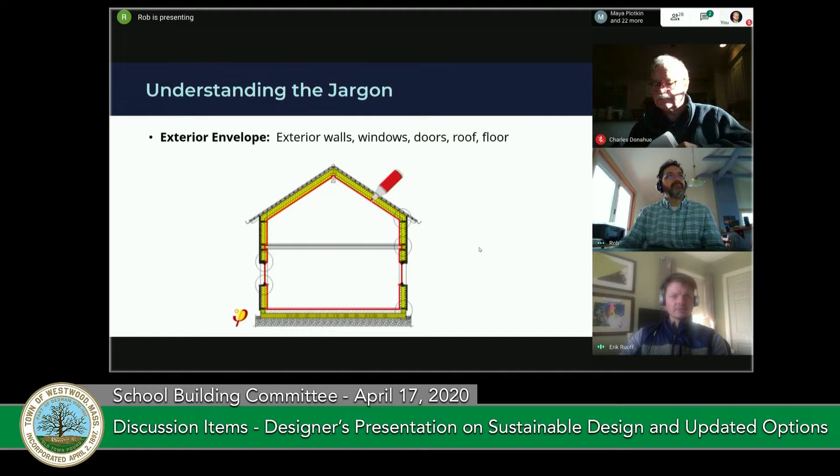So keep moving here. Exterior envelope, what does it mean? Well, it's the walls, windows, doors, roofs, and floors of the building, right? This is the thing that keeps the weather out and keeps the warm and the cool in. So we just want to make that as robust as possible, understanding that it will impact the performance of the school.

So also talking about some of the systems that may be proposed, there's a lot of talk about using heat pumps, right? Heat pumps are basically a system that moves heat in or out of a building using the refrigeration cycle. You can think of this as the AC unit you have in your house, where there's a unit outside that is, in the AC world, moving the heat from inside your building outside. Well, heat pumps have the ability to go both ways and either remove heat from inside or deliver heat inside, and they use that through the refrigeration cycle to be able to steal or get rid of heat based on the simple refrigeration cycle.

And these systems use all electricity for heating and cooling, which has some benefit when we talk about decarbonizing buildings and looking to make a building that's ready to be net zero and reduce carbon, the burning of fossil fuels on site. So this is the alternative to a natural gas heating system, going with a photovoltaic supported heat pump type system, whether it's air, ground, or water.

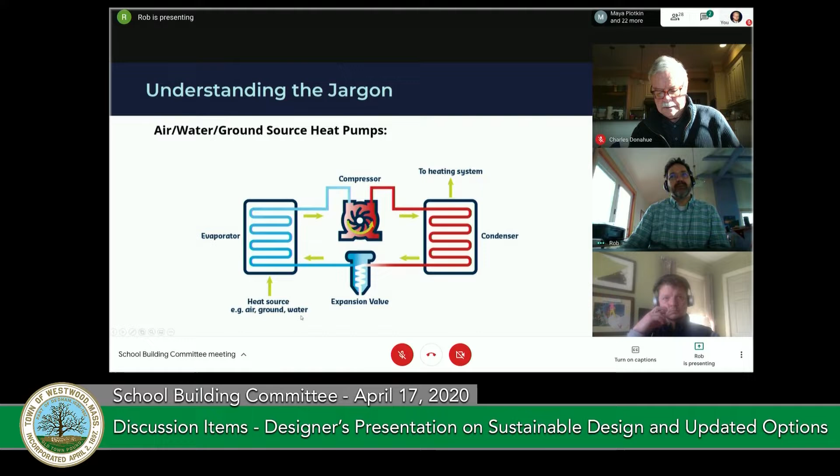We'll talk about this in the next slide. So people talk about geothermal or ground source heat pumps. Geothermal is actually a misnomer - you think of geothermal, you think of Yellowstone or Iceland, where there's actual heat under the ground. What a ground source heat pump is, again, since heat pumps are moving heat from inside to outside, they have to be able to source that heat or get rid of that heat to the outdoors. When you're talking about an air source, which you think traditionally of your house, the air temperature fluctuates much more season to season, when the ground temperature remains largely constant throughout the year. So there's some increased efficiencies of an already efficient system when using ground source heat pumps.

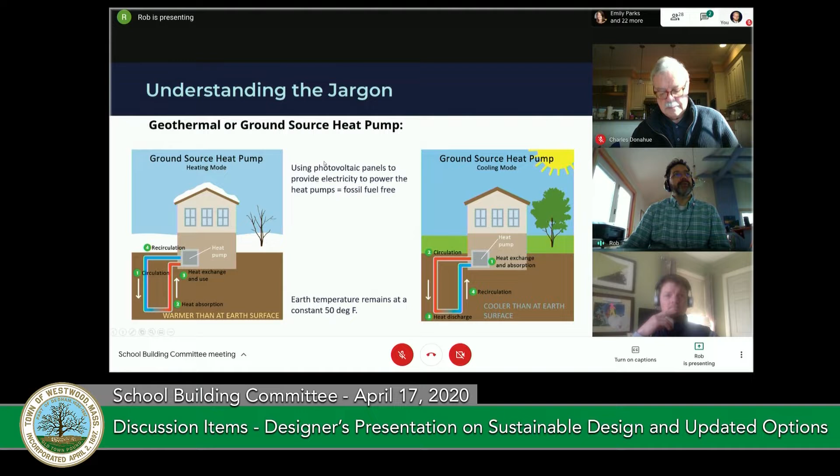There's also some added costs, right, because rather than just having the outdoor units, you have to drill wells to create that system. And again, the benefit here is you're not using any fossil fuels - you're able to support this system using the photovoltaic panels.

So talk about net zero - what does that mean? Well, it means at the end of the year, your building produces as much energy as it consumes throughout the year. Our goal is to design a low energy building, and there's discussion about how to make up that energy consumption through linkage to some of the town's initiatives for photovoltaics, and making the roof positioned to take on or install photovoltaics on site as well.

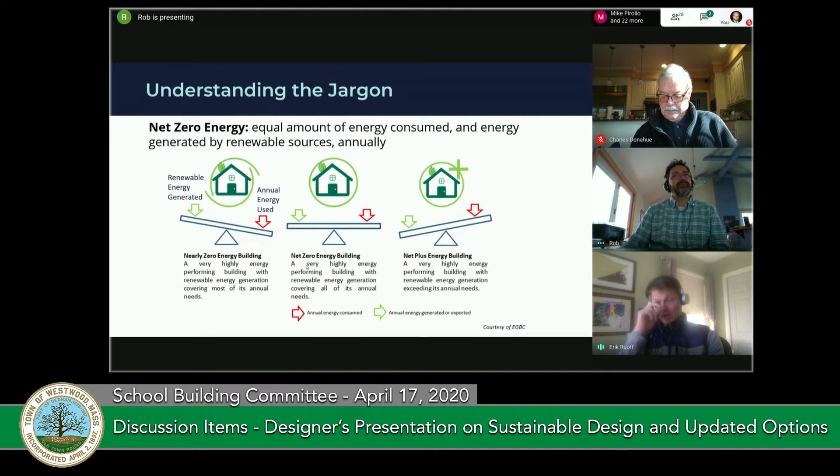So energy use intensity, if you've heard EUI, what does that mean? Well, it's the energy that's consumed at the building on a per square foot per year basis. This is a normalized way to compare the performance of different schools or buildings in general. It's a good tool to study how various decisions, whether it be the envelope, reducing loads through smarter technology, or more efficient HVAC systems, have a knock-on effect on bringing down the overall energy use of the building.

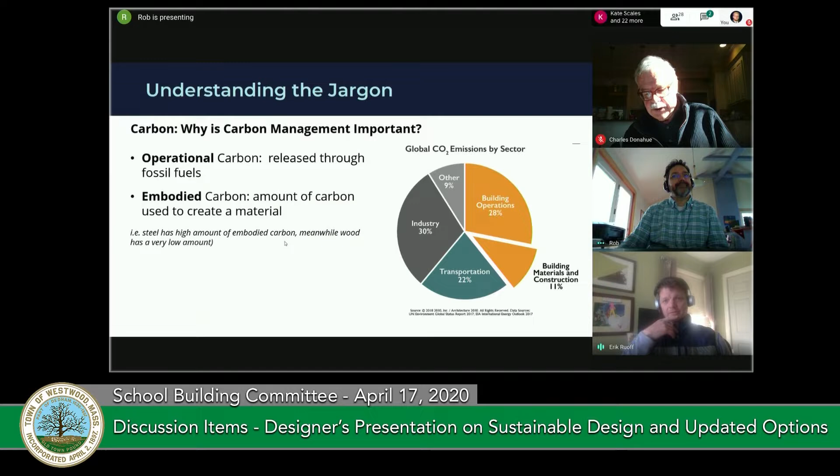Steel and concrete have a higher amount of embodied carbon - it takes more fuel sources to create and deliver those materials - whereas wood has a lower impact. So the team is looking at situations to reduce both operational and embodied carbon.

So we talked in the first slide about a few documents we need to create that help us fully refine our understanding of our priorities and deliver a project that meets your needs. There's this owner's project requirements document, the OPR - again, this is a document that should come from the owner that outlines the goals and requirements you want the project team to deliver. The basis of design, on the other hand, is the response to that - saying what is the intent of the design, and how does it meet those requirements as outlined in the OPR. We're going to have a description of all the HVAC systems and design strategies to meet those requirements.

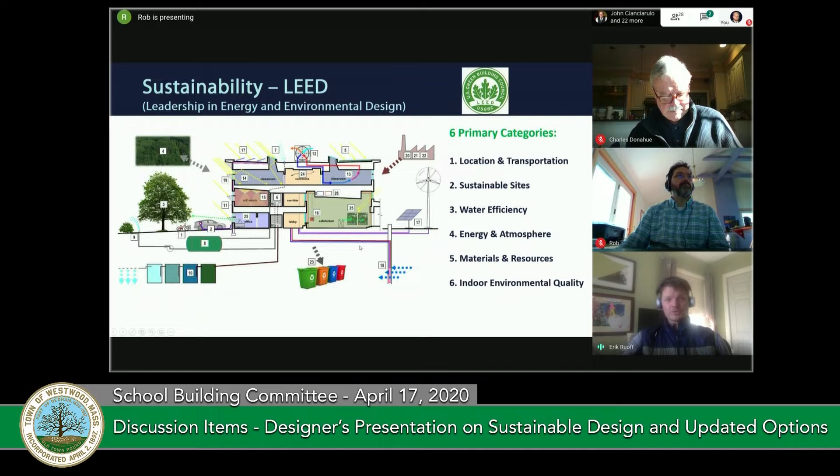Then we talked also about LEED. LEED is a whole building green building standard. It looks not only at the design and construction, but also where the project is located, what are some of the attributes of the surrounding area, and it's broken down into a number of categories that have both prerequisites and optional credits that a project can pursue. It's holistic - it looks at site, water, materials, energy, and indoor environmental quality.

We will continue to work with the team and the town to understand the priorities, recognizing that the MSBA has a minimum requirement to at least hit LEED certified, which means we have to satisfy all the prerequisites and get at least 40 points. We understand there's less emphasis from the town on hitting a higher level of LEED certification, but we're going to continue to evaluate the design and options against all these credits so we can do what's best for the overall team. So what are the high-level benefits of...

Hey Erik. I hate to interrupt - can you move your microphone? Every time you move, it keeps rubbing up and down your shirt. Thank you.

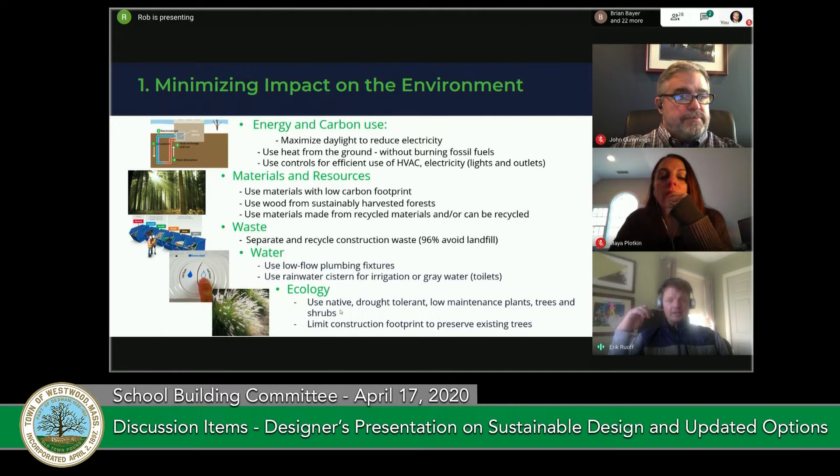Improving health and well-being: we want this to be a safe and productive learning environment for students. There's lots of research about how sensitive students are to indoor environmental quality impacts, whether it be proper daylight, good ventilation, or high air quality within the space. So we'll design the building to meet all those criteria using non-toxic materials, bringing in daylight where possible, pulling daylight further into the building, and making the building an active part of the educational process.

The final piece is the economic impact. We want to maximize our use of renewable energy, which will lower the operating cost for the life of the building. Daylight also has educational benefit, but it will reduce the need for artificial light and reduce overall operating costs. We want to keep the heat or cool in, so we'll build an envelope that assists with that. We also want to be efficient in our use of water, looking for opportunities to capture and reuse water should that pan out, and make sure the building operates as efficiently as possible once operational.

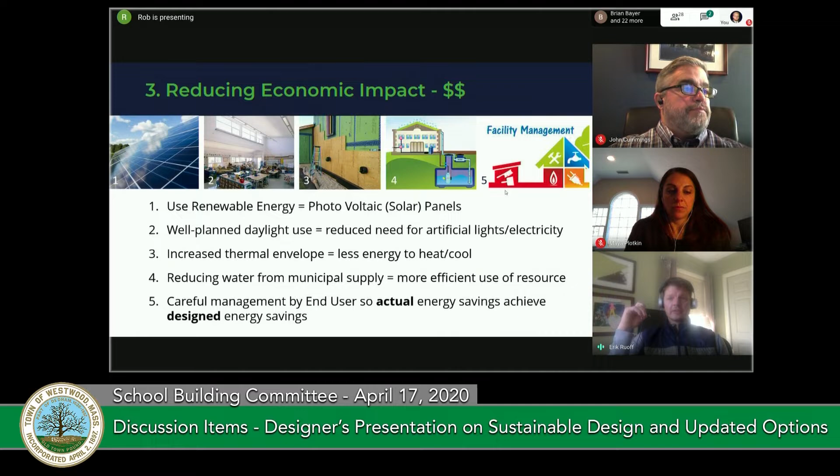So what are our requirements? At a minimum, the MSBA project must achieve LEED certified - that's 40 points and all the prerequisites - and exceed the base code by 10%. To be eligible for an additional 2%, there's no change in the LEED certification threshold anymore; that used to be the MSBA requirement. Now it just maintains meeting that certified level, but you have to exceed the energy code by 20%. That's our direction as a team, and we're confident we'll get there.

We have a number of studies in progress right now. Right now we're looking at using a natural gas heating system as our baseline approach - condensing boilers, a high performance system. As an alternate, we're looking at two approaches to being fossil fuel free: one might be an air-to-water heat pump, and another would be the ground source or geothermal heat pump system. In addition, given the importance of carbon, we're evaluating timber frame construction versus steel frame, which would have a significant impact on the embodied carbon in the building.

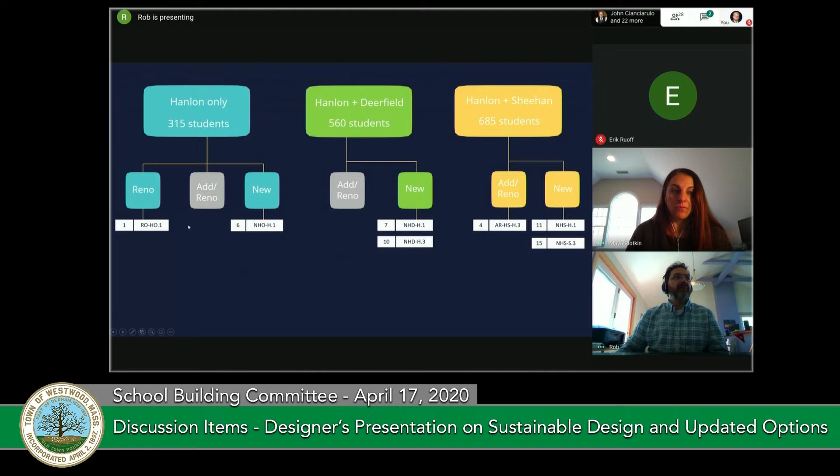So just recapping where we currently are at the end of the PDP phase. The committee narrowed down the options. So we've eliminated the addition renovation to the Hanlon, and the addition renovation to the Hanlon Deerfield enrollment.

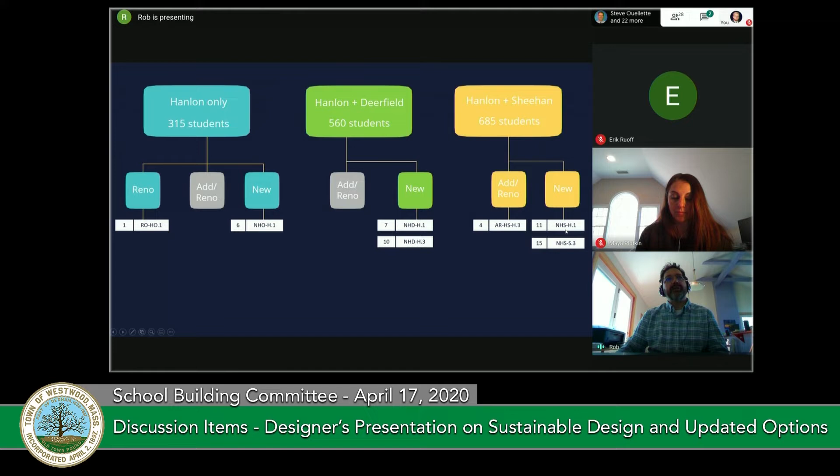And so we've got a renovation for 315 students at the Hanlon, a new school on the Hanlon site, two variations of new schools with the Hanlon Deerfield population on the Hanlon site. We have an addition renovation for the Hanlon Sheehan population on the Hanlon site. And we have two new options for the Hanlon Sheehan, one on the Sheehan site and one on the Hanlon site.

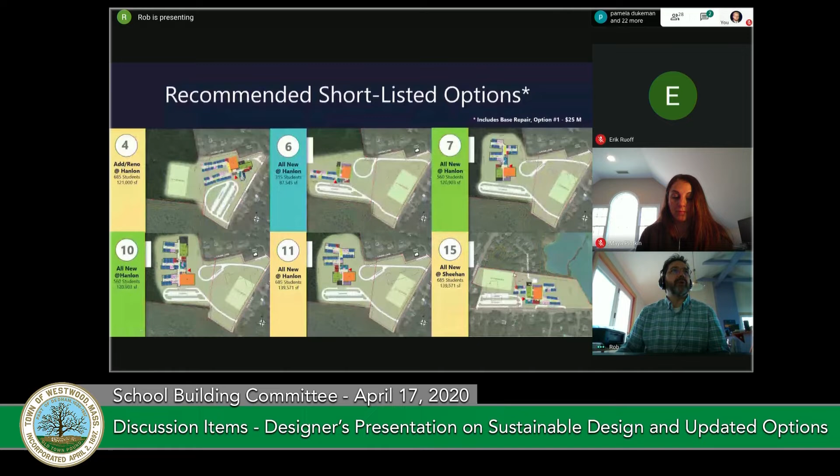And so this is graphically basically what I just went over - the sheet that shows in total those remaining options that we're continuing to look at. So just walking through each one - today I'm really just going to show you what's been updated since PDP. Really nothing's changed on this. This is just identifying the base repair renovation, the Hanlon School.

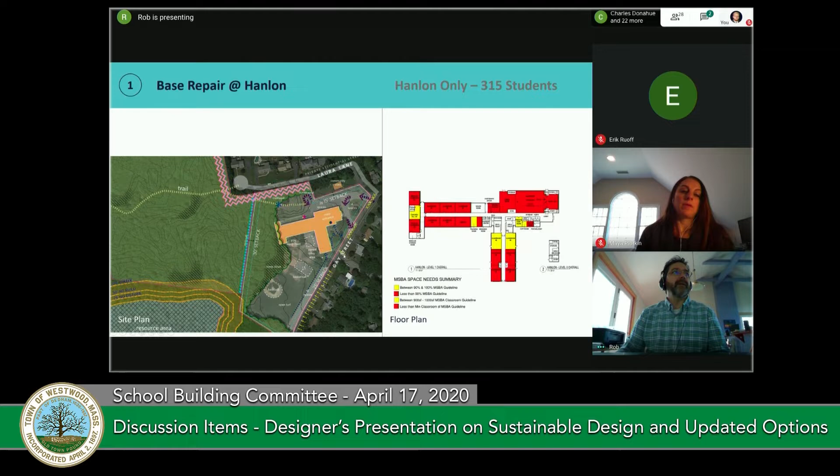Rob, you're fading out a little bit. Can you just speak up a little bit? Sure, thanks, yep.

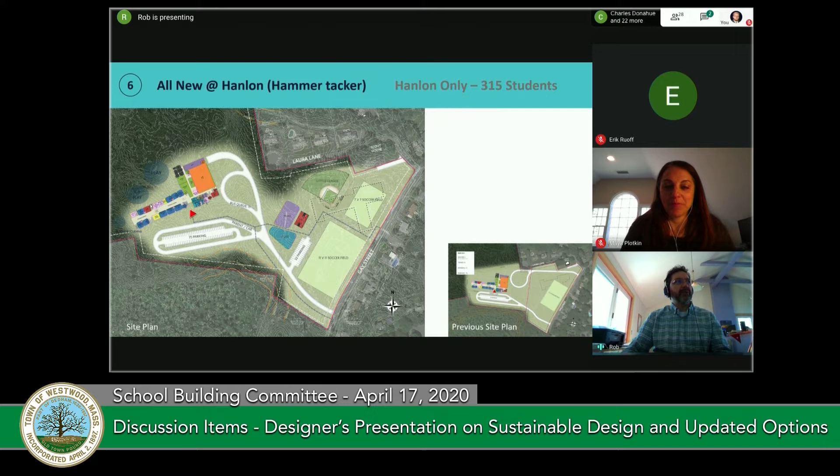And in the back, we've got some play areas associated with the classroom or academic wing.

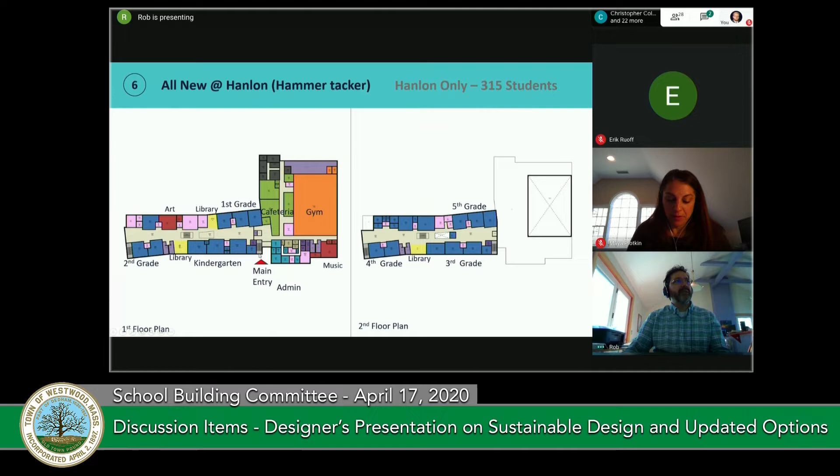In terms of the floor plan, it's really essentially the same as what we've been looking at.

In terms of the T configuration, one of the major moves is that we flipped the T upside down. In the past concept, we had the gym down on the southern end. While looking at that, we felt that with the southern exposure, it would really be casting a shadow over the entrance area. So by flipping it in this direction and putting the gym to the north, that allows for sun exposure as you're entering into the building.

We also opened up a little bit of these wings. We flared these out a little bit to give more room in between each of the wings than there was previously, so that allows each of these wings to have a little bit more space.

We're planning for a playground, some sort of mixture of hard and soft playscape outside of the cafeteria, a kindergarten playground, and then some outdoor learning spaces. Exactly what those are, we haven't entirely defined yet, but we have some ideas and we'll continue to go through that.

So here we've got, in this concept, we come in through the north, and this allows for this sort of approach to the school, and then the parent drop off over here.

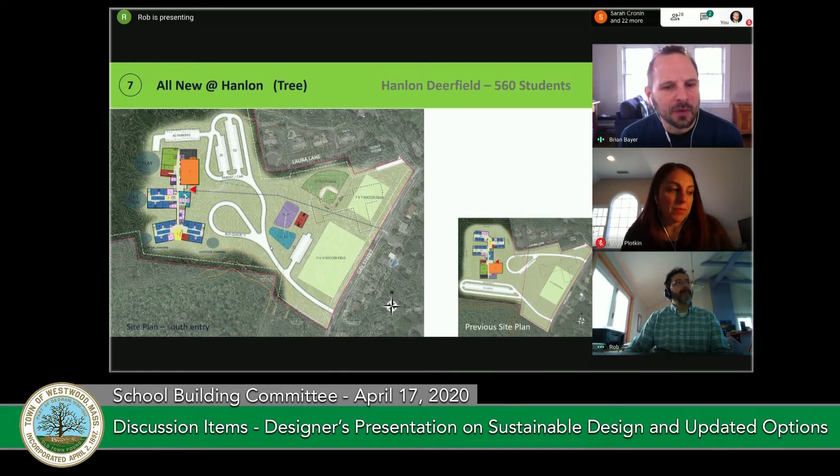Hey Rob, can I ask a few questions? This is Brian. I'm seeing two different play areas. Are the play areas by the school, by the woods, anticipated to be the play areas for playground use during the day, recess, and the play areas up towards the street are not necessarily? Yes, correct.

And then the dashed gray lines, are those walkway paths or sidewalks? Yes, thanks for bringing that up, I forgot to mention. The dashed gray lines are intended to show and appreciate that there are a lot of walkers within the Hanlon area, so we're trying to indicate potential walking paths for students. We might anticipate a meandering walkway leading up to the front entrance, or alternatively a path that goes directly up the side of the road here and leads up to the building.

These play areas are really just placeholders, that's also up to further discussion. Do we want structured play areas, or just a flat grassy multi-use surface? We're also indicating a basketball court, but we don't know if that's desired here, down in the community area, or up closer behind the school or somewhere else. This is just our first attempt at throwing this out to see what you guys think.

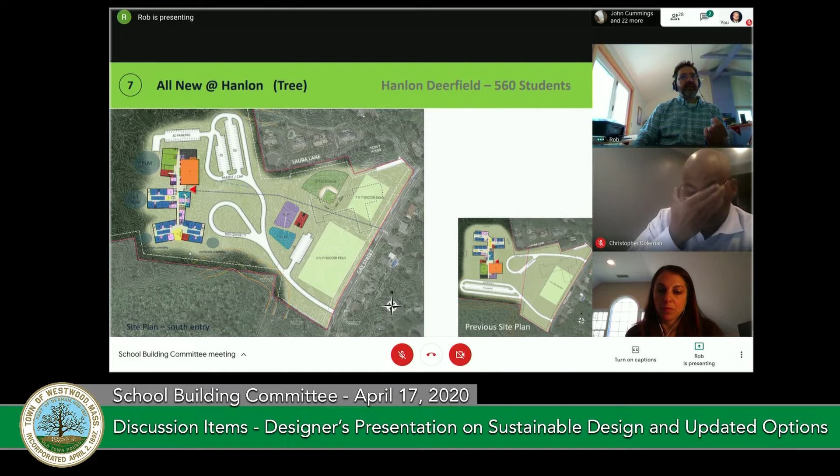Right, but I think when we were having discussions about the building and the layout, you and Jason had mentioned that the layout of the building as proposed during this phase, if that's the selected option, can't really be changed once we move to schematic, because the MSBA doesn't like that. I just wanted to know if that same concept applied to the exterior and the landscaping, the plot plan. No, there's a lot more flexibility in the site for us to modify things and shift things and add things.

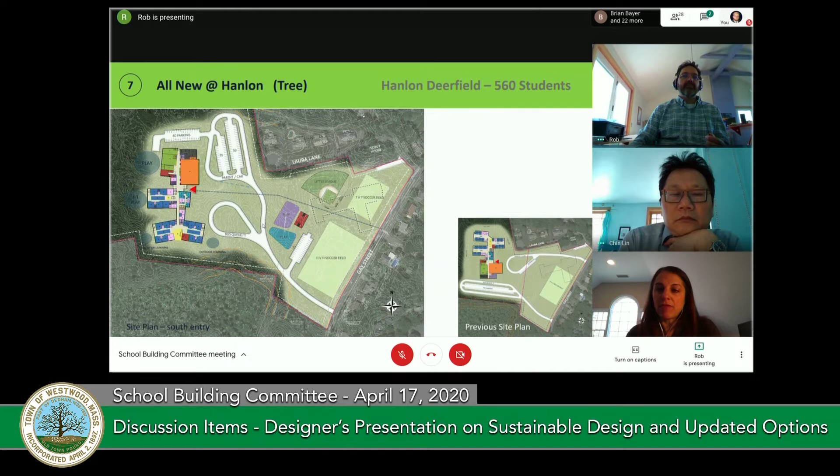I think what's more important is that we have money allocated for, let's say, hardscaping or playground areas, as placeholders, and then we can play around with the actual design later on. But if we're moving forward with these designs, once we have the final selection and the SBC votes to approve it, we can then engage fire and police and make sure the bus line and the fire lane and everything is in compliance. Is that right? Yes, correct. I just don't want to waste their time reviewing plans that we won't actually move forward with.

Yeah Maya, this is Brian. That's true, I think for planning purposes though, I agree with Chin. It's a pretty important decision because the footprint that bus parking would take up is large, and also the cost we need. Sorry Brian, to interrupt you. I absolutely agree, we need to know that now. I'm just talking about engaging with fire and police.

Sure, yeah, I agree, in terms of the specifics about the lanes. I agree, but I absolutely agree, if we're going to park buses here, we need to make that decision very quickly, because planning and cost, it's the paving, but it also affects the discussion of geothermal and the discussion of drainage on the site and those systems. Correct, Rob? Yes.

Excuse me, I will certainly defer to you guys, you're the professionals in this. I actually like number 7, but the concern I have is based on my conversation with the chief - I just don't see how the fire lane is going around the entire building. So whatever you guys determine, I just wanted to raise that point to you.

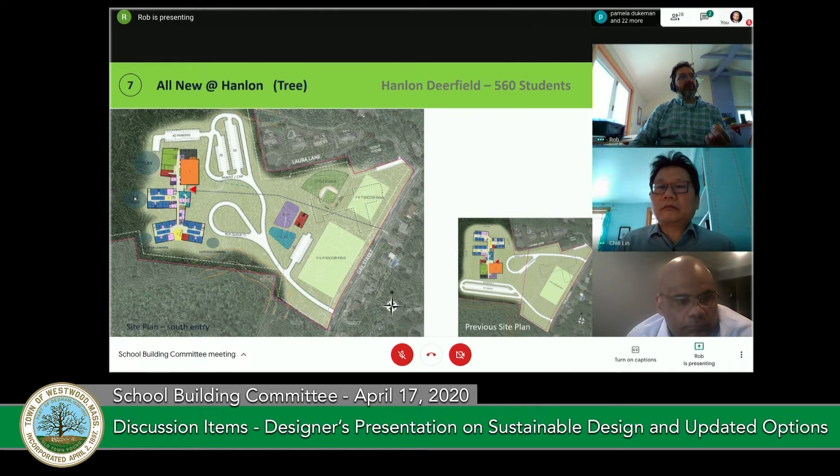Thank you. Yeah, from our perspective, a lot of times what we've been able to do is integrate this. So for example, imagine this play area out here, there's a portion of it with hardscape, where kids are playing hopscotch or that sort of thing, and it's really identified as playground area, and it might have a gate here, for example. The same thing may continue around - there's a pathway for a fire truck to go through the playground in an emergency, but it may be fenced off or gated off. We'll have to take a close look at that and have the discussion with them to see what exactly that looks like.

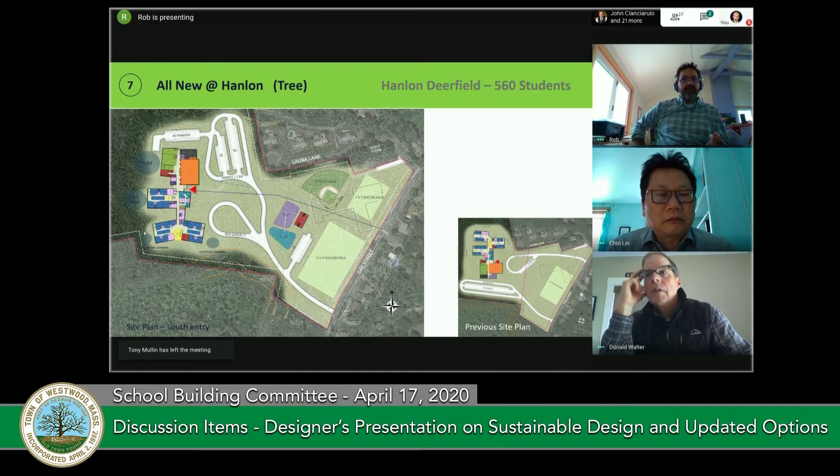The other thing we've also done with other school districts is using reinforced grass pavers, so there's an integrated reinforced system underneath the grass area in a playground. We've reviewed that with other fire departments, and they've found it acceptable for certain sections of the circulation around the building. So we'll continue to have that discussion with the local officials. Okay, just so you know, he has emphasized to me paved.

So what you just described to me, maybe this is something that you guys can work out, but based on my very brief conversation with him, that approach may not satisfy what they're looking for. So again, want to raise it as early as possible.

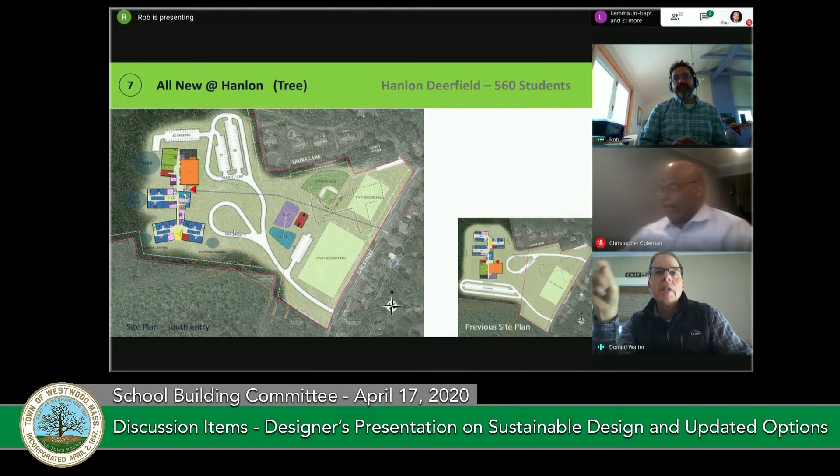If I could jump in here, Don Walter, if anyone has seen the Sunita Williams School in Needham, it's a good example of what Rob's first thought was, where we use the play area as part of the emergency vehicle access around the building. When you're back there, you wouldn't even know it was part of the emergency access because they're using it on a daily basis for play activities. So there's very creative ways of doing it. It's not just a road around the building, but it certainly satisfies the public safety needs.

And we'll confirm that with them for sure. I think for the Dore + Whittier team, you just need to start planning that and maybe starting to indicate on the site plan as you progress, to show that yes, this is being kept in there, and then there will be some overlap in terms of hard play surface and such.

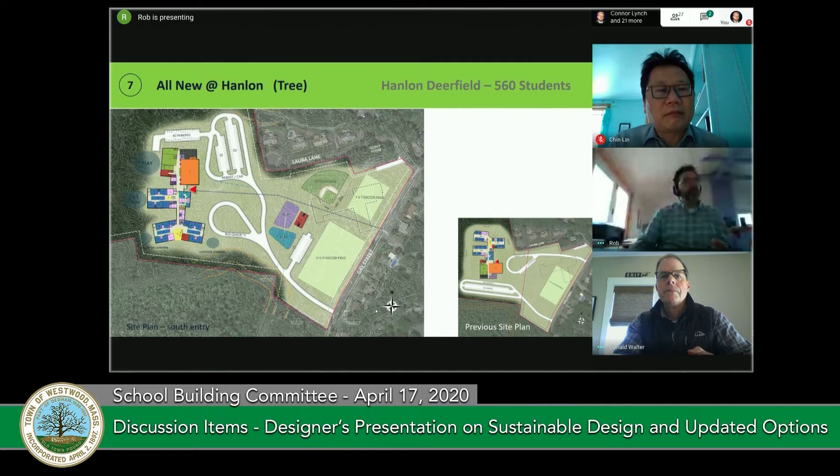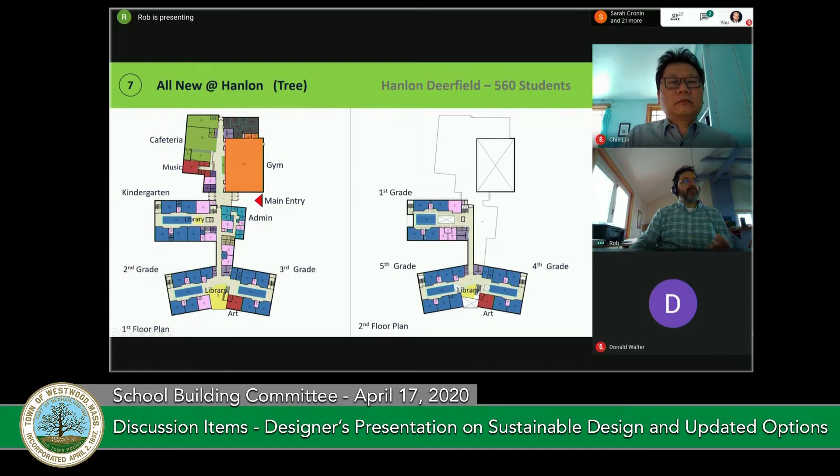These obviously have doors that would enable these wings to be locked off from the public area. This also has this axis of entering and then exiting out to the back as well. Both scenarios anticipate or look at the possibility of students coming into the building and then maybe coming out to a play area before school starts, or accessing the gym or the cafeteria before school starts, but always having this sort of clear connection to the woods and to the exterior spaces.

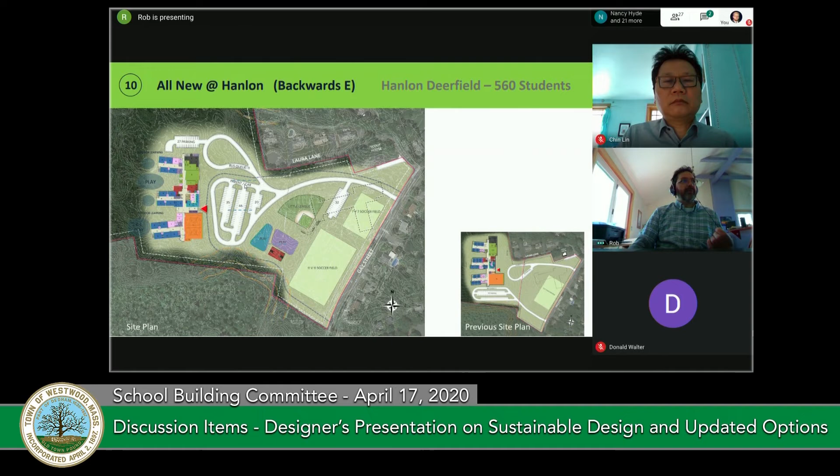And again, here we flared these out a little bit as well, giving additional room in between each of these wings, and made some minor modifications, some refinements to this art area, creating a gallery space and a nice connection between the art and music space, with the music space right behind the stage area.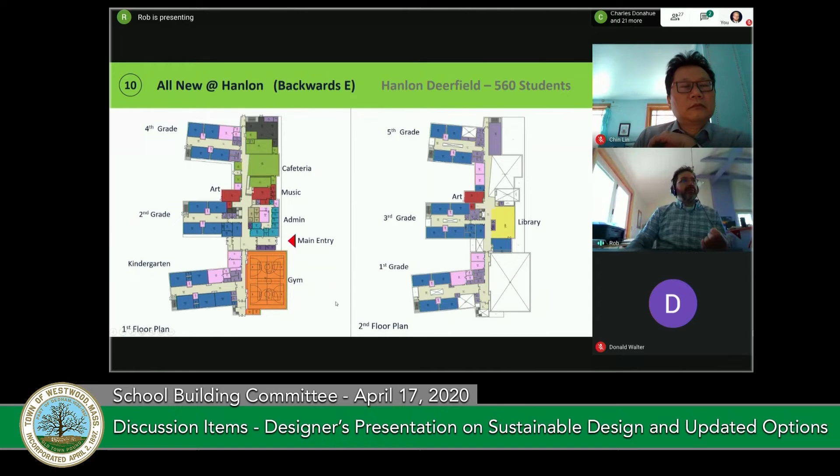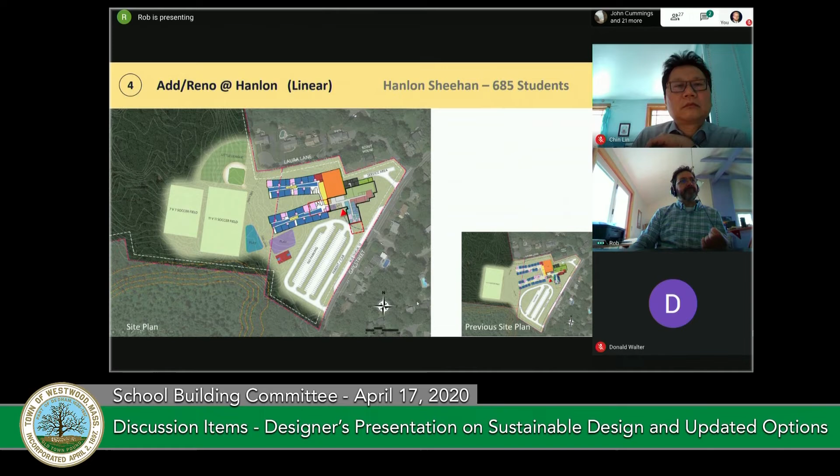Going on to the add/reno of Hanlon for 685. So really the concept of the site really hasn't changed very much. You can see here we've kind of consolidated a little bit, tightened up the roadway a little bit closer to Gay Street to give a little bit more space for play areas, and indicated the number of fields that we've been talking about. Each of these options, we're trying to fit a little league field, 11 versus 11, and a 7 versus 7 soccer field on each site. Again, the floor plan is about the same.

And this is the older plan, again with the library in the center here with this integrated space. And then the Hanlon Sheehan 685, new on the Sheehan site.

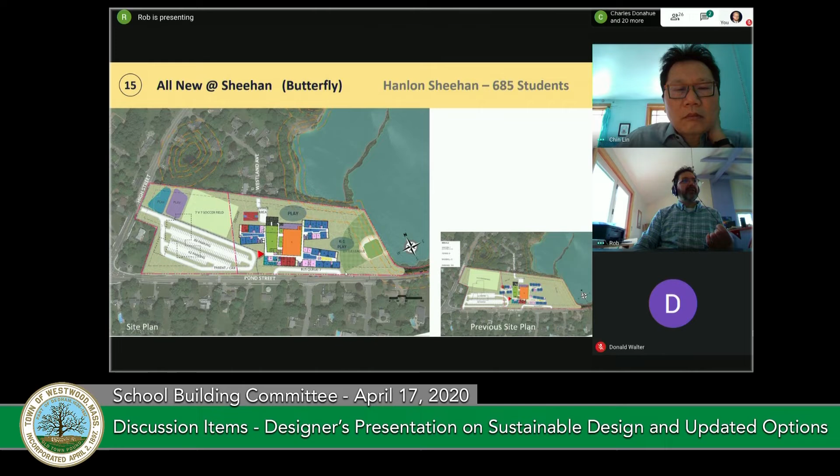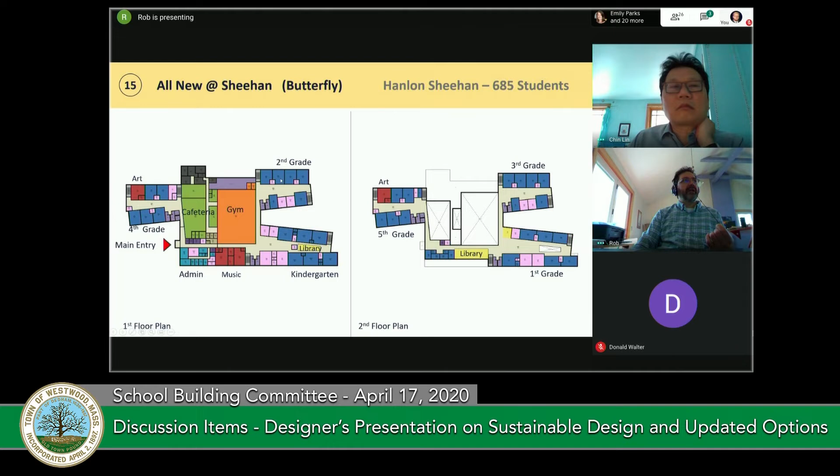And the floor plan really is very similar to what we've shown in the past. We fine-tuned the shapes here of the extended learning areas for each of the academic wings. So moving on to evaluation criteria, unless there's any questions on any of the options.

Hey, Rob. Yeah. Oh, go ahead, Allison. I was going to just read your chat question. Go ahead. Oh, I was going to say, I just had a question on the tree option with the gym at the south side,

Whether it was an option to move the entrance north of the office to mitigate, and whether that was explored at all, and if so, if it would mitigate the shadow problem.

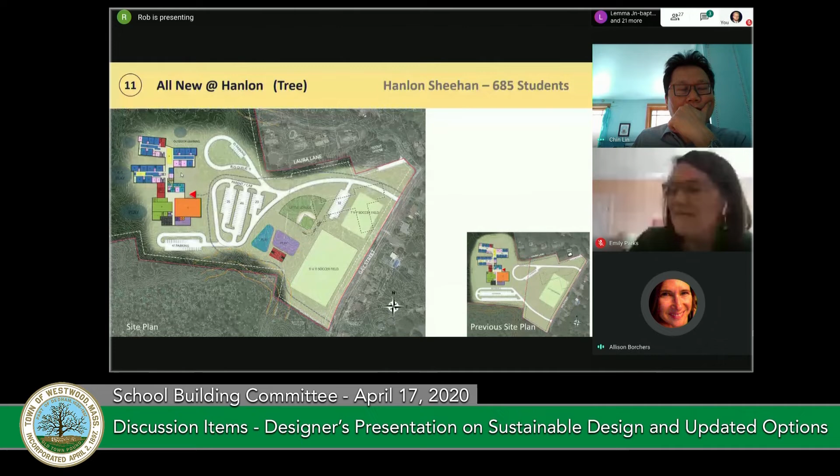Yeah, one of the reasons why we were trying to locate the entrance here is to have this sort of separation between the private and the public area. I mean, we can certainly flip this and put the admin here and the entrance here. We were also trying to use this as kind of like a lobby space, gathering area for the cafeteria and the gym during large events. It's nice to have an overflow space directly outside of those larger areas. So that's where that was kind of doubling as that.

Got it. Thank you very much. Any other questions on any other concepts or options that developed?

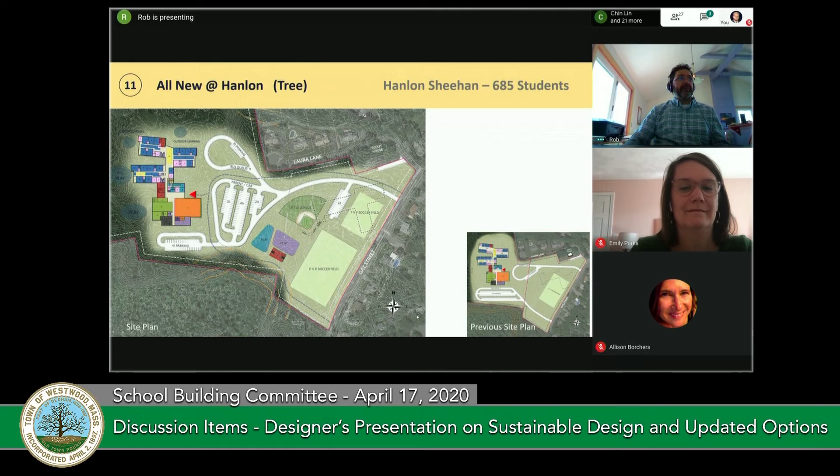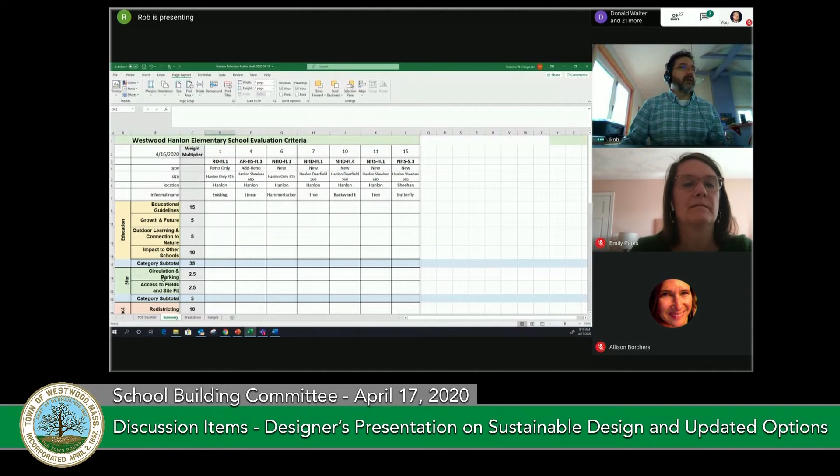So moving on to the evaluation criteria. I've got, let me pull up the spreadsheet here. Can everybody see that? Everybody see the spreadsheet? Yep. Okay, so this is the PDP shortlist. We've kind of gone over this at the last time with the evaluation subcommittee.

There are a number of groupings here that we've created as a continuation from the PDP, but further expanded them into subcategories. So here we've got education, which covers educational guidelines, growth and future, outdoor learning and connection to nature, impact to other schools. We've got a site category that covers circulation and parking, access to fields and site fit, town impact, which incorporates redistricting, traffic, and community use, security and sustainability and construction, logistics and impact. Those all fall into this sort of miscellaneous category.

Then we have a cost category, which covers overall cost, the net cost to the town for all three schools, and then busing and operational costs. So I'll go into further breakdown of that in a minute.

And what we've also reviewed with the evaluation committee is utilizing a weight multiplier. So each subcategory would utilize an additional weighting factor that would be applied to how each of the options are scored. So all the options are across the top here, and this was discussed in good length with the evaluation subcommittee.

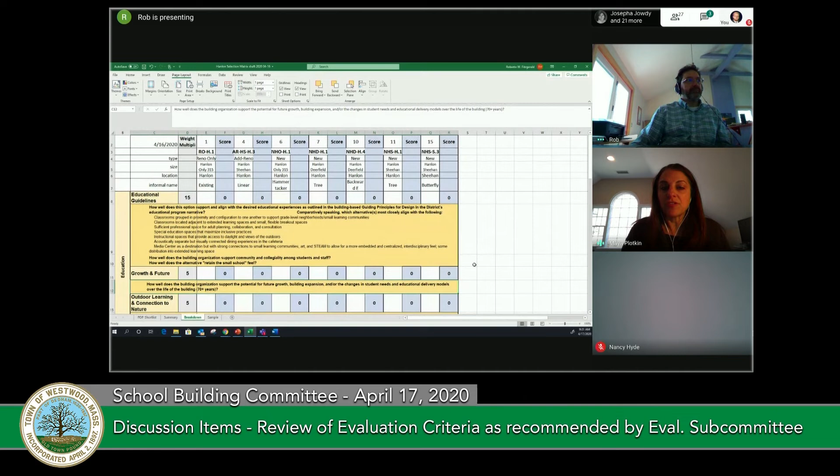For example, the 315 Hanlon new build would score very high in the old rubric because it meets a lot of these criteria, but there are significant issues with it. That was the goal of the subcommittee. I feel we had a lot of great conversations around the criteria, and the subcommittee is comfortable with the weighting and the questions. To the extent we could, we feel we addressed each of these categories pretty extensively. But of course, we want to know what you guys think.

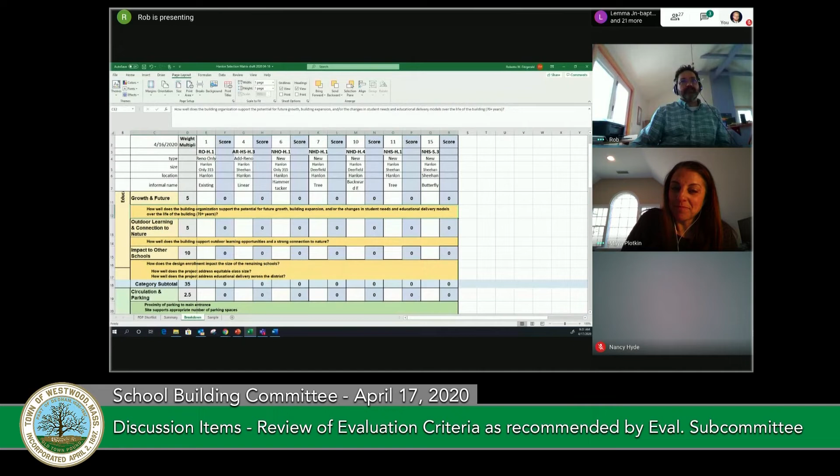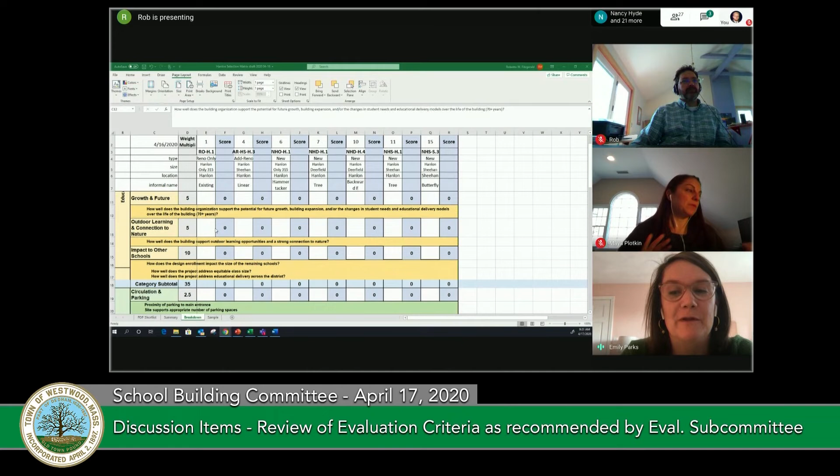If I could just add one comment, I agree the subcommittee had a lot of really good discussion in developing those questions, and you certainly start to think about a lot of issues. I also want to emphasize we thought quite a bit about the input we've gotten from the community at community forums in thinking about what needed to be included in the evaluation criteria. So I'm feeling comfortable this matrix reflects those concerns from the community as well. Yeah, that's a great point, from the community and from the educators as well.

So does anyone have any questions about any of this? Just a quick question for whoever's scrolling, could you scroll to the impact to other schools subcategory again? Thank you.

One thing I was thinking about is whether the weighting of that might be changed by the situation we find ourselves in. It's just a question to consider.

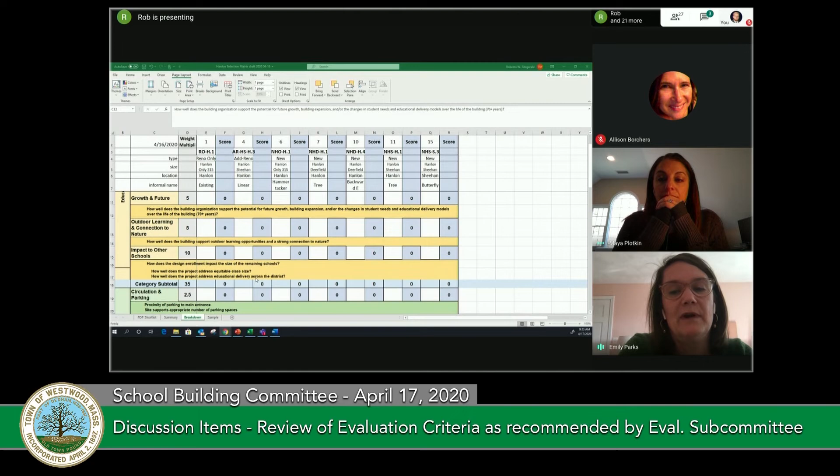That's interesting, Allison. We had a lot of conversation about that category and what it should be weighted. I think what we landed on is that the issue is represented in two different places on the matrix. You've got impact to other schools there, which talks about some educational impacts because it's in that yellow category. But then down below in the cost section, the issue comes up again in the net cost to town for all three schools, which is weighted as 10 points as well.

So you've honed right in on the areas of the rubric we had the most discussion about yesterday. That totally makes sense. I'm just struggling personally to get my head around it, because I feel we don't fully know yet what the current environment's going to do long-term. So I think it's great if there's some weight built in that tries to account for that. I think it does, but we're certainly open to feedback if there are concerns about that.

Anyone else? Last call. Okay.

So if there's nothing further on either the sustainable design primer, the updated options, or the evaluation criteria, Rob, did you want to talk about next steps?

This is just a recap. We've shown this at the end of the meetings in the past, and just wanted to highlight this as sometimes it's nice to know what's coming up next. As you mentioned earlier, there's a community presentation on redistricting on the 30th of April. May 29th is the next school building committee meeting.